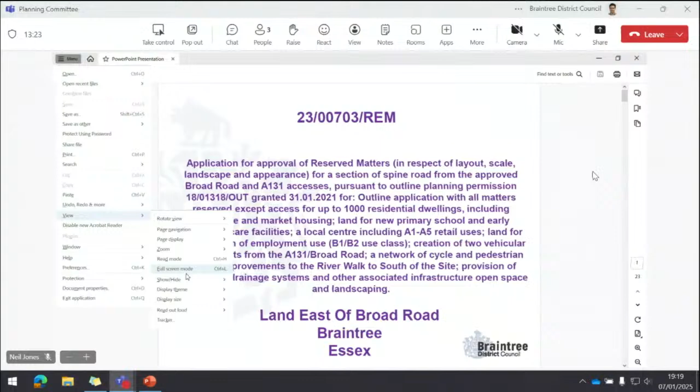We'll now move on to the officer's presentation, which will be given by Neil.

Good evening, members. This is an application for approval of reserved matters in respect of two stretches of highway, one on the western side of the site coming off Broad Road and one on the eastern side coming off the A131. As members will remember, the outline application approved access at those two points. So this is approval of the reserved matters - appearance, layout, scale and landscaping - for those first stretches of road coming into the site.

So this broadly is the site here. You've got Broad Road coming along the western side, the A131, the Braintree bypass on the eastern side, and what we're looking at here is two accesses, or two lengths of highway, coming into the site - here off Broad Road and here off the A131.

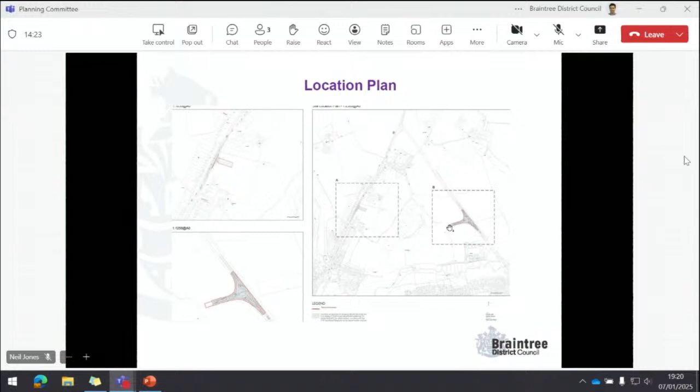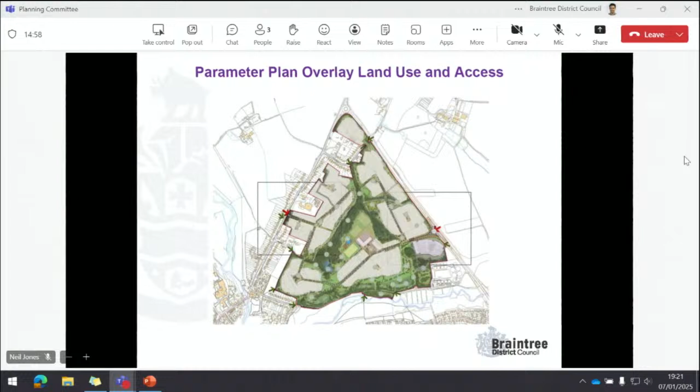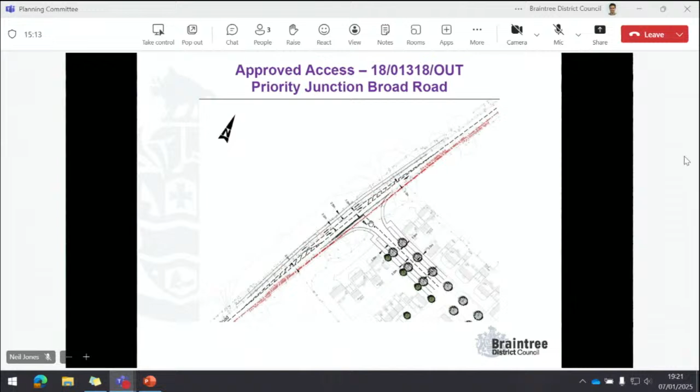In terms of what we'd approved previously, this was the drawing showing the access coming in off Broad Road. You can see Broad Road being changed to create a right-hand turn lane as you come in. This access point was agreed here, and this is the spine road design for what's termed Area 1 within the application documents. This is the approved access, and this is the first length of carriageway coming into the site.

You can see grass verges to either side, footway and a footway cycleway to either side. You can also see the crossing point here, just where it's envisaged that when the residential parcels come forward, there's potential for small private drives with residential access coming off either side.

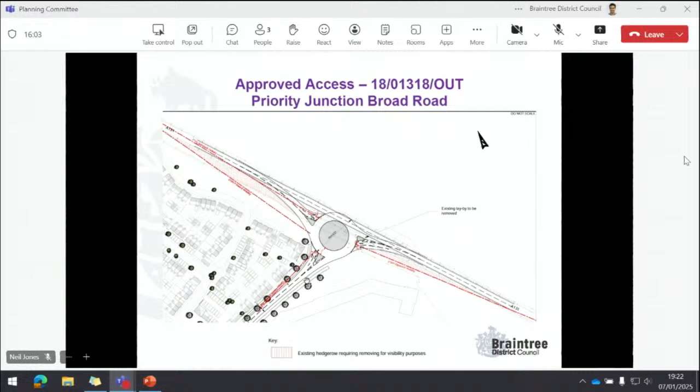Looking at the other side of the site, this is again the approved drawing from the outline permission. This is the roundabout which will be constructed on the A131 and the first length of road coming into the site. This is what we've got in terms of the reserved matters, so the first length of carriageway coming into the site. Again you can see the same arrangement: 6.75 metre wide carriageway, 3 metre grass verges either side, and then the pedestrian footway and the foot cycleway to either side.

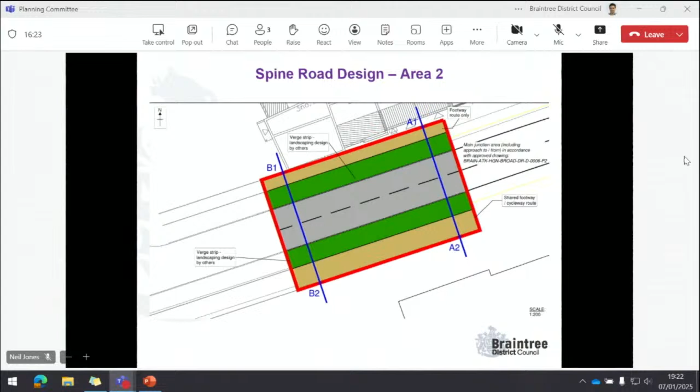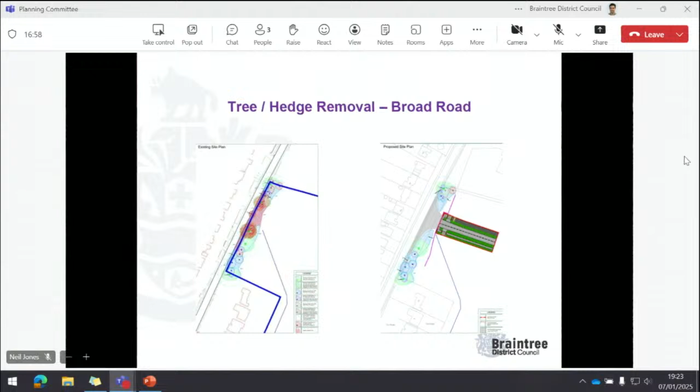We appreciate that members are always concerned about the loss of trees and hedges, and regrettably that is required here. But to make the point, what we're looking at with this application is the first lengths of road coming into the site, so there are no additional trees or hedges being proposed for removal as a result of this application. There were obviously trees and hedges needing removal to facilitate the accesses, but those access points have already been approved. So we're not reporting any additional losses of trees or hedges which weren't previously considered and approved by the council.

Within the application that was submitted, there were details showing how the trees will be planted, how they'll be anchored and supported, and tree root protection measures being put in place. As planning officers, we didn't have any issues with what was being proposed. This was what was envisaged by the design code, as was the tree type that the applicant specified.

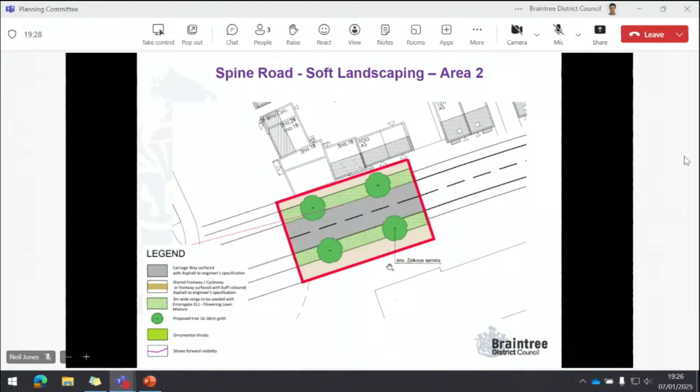So what we're recommending is approving some of the details of the landscaping. If we go back to the previous drawing, we'd be approving this drawing, showing trees being planted within the verge at these sorts of spaces. But what we're not approving is the species of tree or the planting details here. These may be the details that end up being approved, but what we want to do is make sure the Highway Authority are comfortable with all of those details as they're worked up through the Highway Works Agreement, which would allow the road to be adopted if it was built.

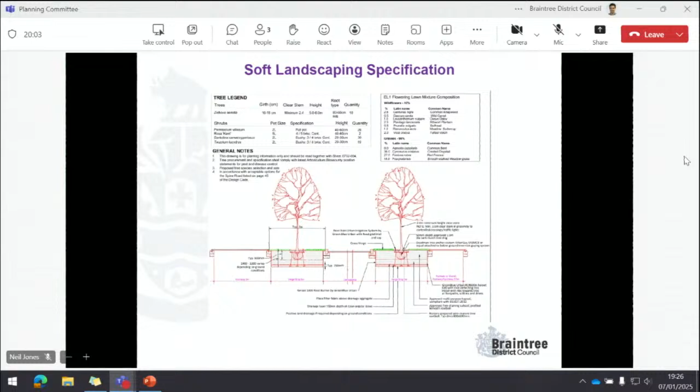So what we're looking to do is recommend approval, but with some of these details around the landscaping to be covered by condition, so that the planning authorities still have the ability to consider and approve the details, but that's done in connection with the Highway Authority as part of the Highway Works process.

So this is just an image of the tree being suggested by the applicant. This is one of the trees that was included within the design code we approved as part of the outline permission. I've put some details there with regards to the tree type from the Royal Horticultural Society. The planning officers who assessed the design code, the urban design consultant we use, and the landscape officers were all happy with this as a street tree.

Moving on, just in terms of a couple of photos to show the context. Anybody familiar with the Braintree bypass will be aware of the lay-by as you come up the hill towards the High Garrett roundabout, coming up towards the top here. This is the location of where the roundabout would be formed coming in, and this is just a photo showing the inside of the hedge and the site. This is what the entrance will be coming in.

And then on Broad Road, this is just a general picture showing the area where the access would be formed coming in. And this is just looking from within the site, looking back out towards the houses on Broad Road. So that's where the road will be coming in on that side.

So just in terms of a summary, this is part of a larger site which benefits from outline planning permission. We've already approved the access through the outline permission. What we're looking at doing here is approving some further details with regards to the road coming into the site. We've assessed that against the design code approved as part of the outline permission. The proposals are consistent with that. There's no conflict, and therefore we're happy this is achieving the quality we were looking for when we were granting permission originally.

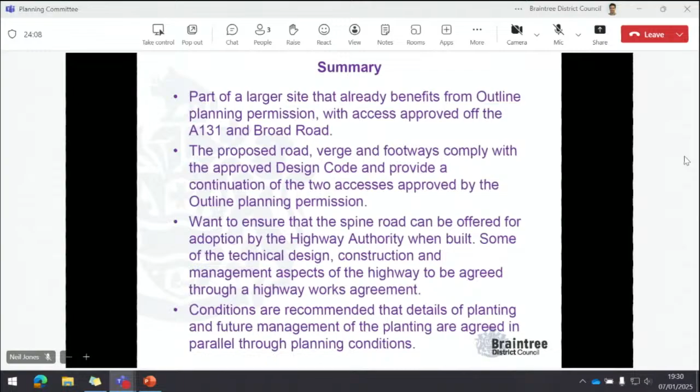Councillor Spray: I wasn't necessarily expecting to go first, Chairman, but I'm happy to do so. I think this is relatively uncomplicated. It already has outline permission, and this is, as Neil has said, almost an additional application for us this evening to look at some of the details of the access which have been approved. It makes sense for me that the details of the planting be deferred for a little while longer until the applicant has confirmation from Highways that they're happy with the arrangements being proposed. So it makes sense to do that. I just think we need to be confident that the planting suggested - well, it doesn't have to be exactly as we've seen this evening - but that it is of good quality and is maintained, which is important. But other than that, I personally see no other reason to dispute anything in the report this evening. I'll leave it at that for the moment. Thank you.

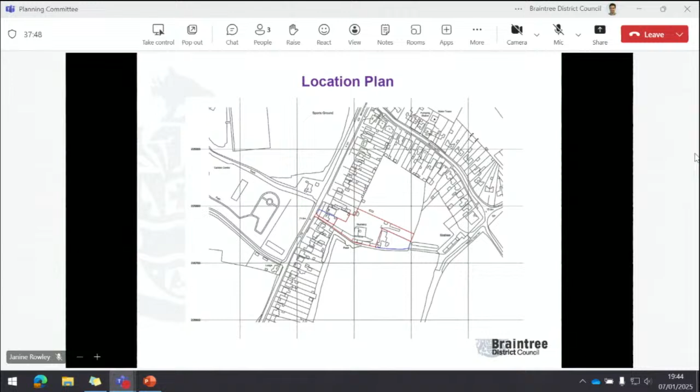As set out in the officer's report, officers acknowledge no permission is required for the siting of the lodges as long as they comply with the dimensions stated in the Caravan Act. However, the submitted indicative site plan of the permanent mobile homes would result in a form of development out of keeping with its surroundings, unlike the prevailing local character.

The proposal would change the use of the land to a use incompatible with the countryside and develop a site beyond the settlement boundary in a form discordant with the linear pattern of existing development, to the detriment of the countryside and the character of the area.

As I said earlier, officers acknowledge that the local planning authority have no control over the mobile homes themselves, providing they meet the definition of a caravan mobile home, but the change of use of land to accommodate 15 mobile homes in this location would be considered harmful to the character and appearance of the site and the wider locality.

Officers would also expect at least 25 square metres of amenity space per mobile home. However, the indicative layout illustrates that amenity areas would be directly overlooked due to the limited separation distance and would result in interlocking. There are also several units which would benefit from narrow amenity strips, for example to the northeastern corner, and then to the southern boundary. This plot here would obviously be hindered by significant tree coverage, similar to this northeastern corner as well.

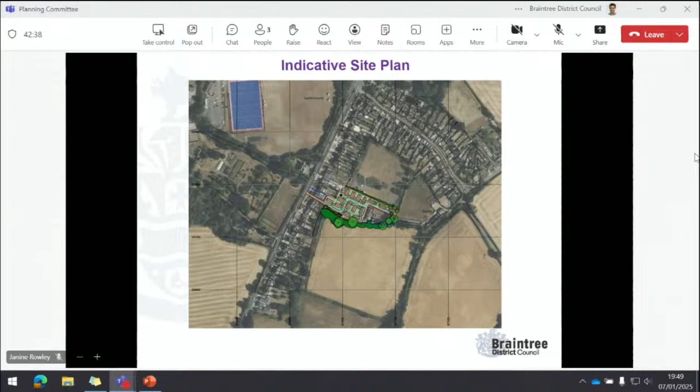This plan highlights the tree constraints. The application was accompanied by a tree survey and various other supporting documents.

However, the Council's Landscaping Services has reviewed the proposal and considers insufficient information has been provided to fully assess the impact of the proposals, given that there are potential issues for harmful impacts onto the trees, particularly ones that are of significant interest, for example, to the south of the site.

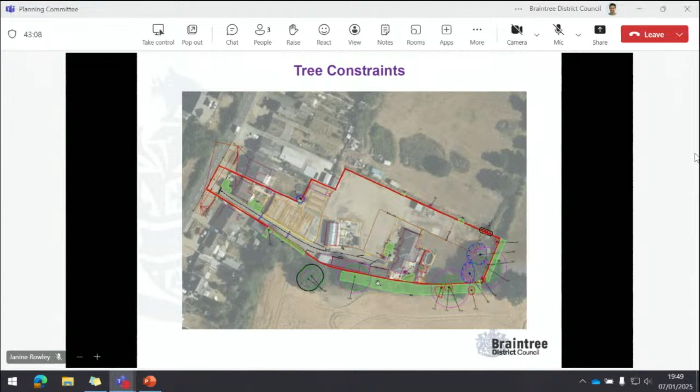The next drawing is a survey. This illustrates the location of the hard standing and existing buildings on site to be demolished.

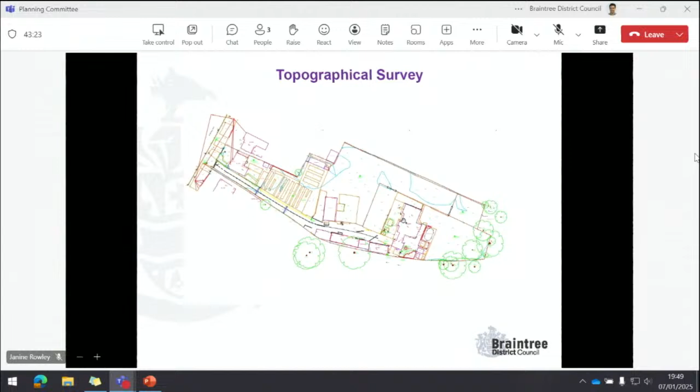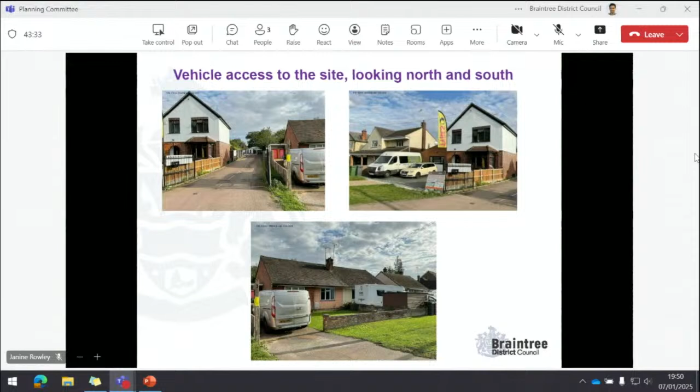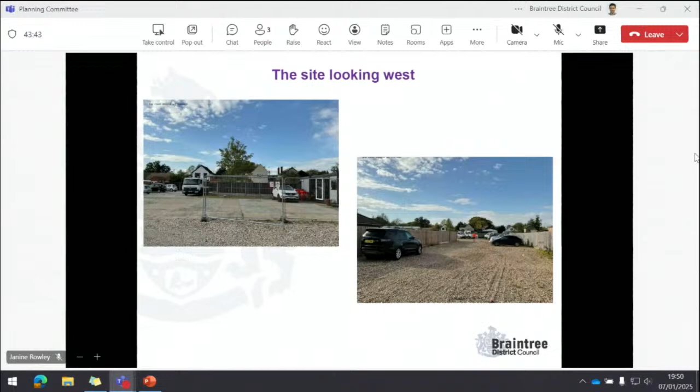The next few slides are photos of the site. This shows the vehicle access to the site looking north and south, the existing footpath, the vehicle access from in the site looking west, the site looking east, southeast, and to the west again.

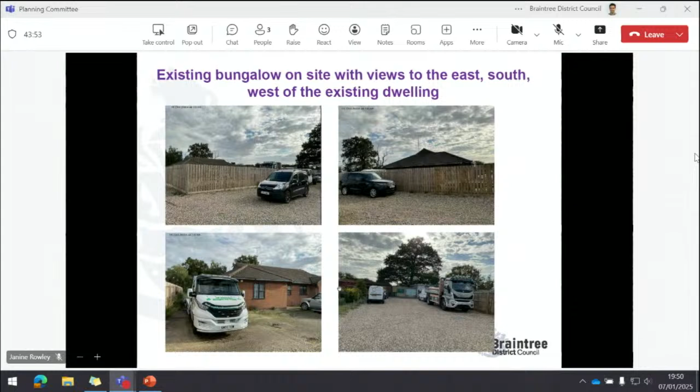This is the existing bungalow to the rear of the site, again with views to the east, the south, and the existing bungalow itself.

To summarise, the application is a full application for a change of use of land for the siting of 15 mobile homes. In terms of its benefits, it would deliver 15 mobile homes of permanent occupation and economic and social benefits during the construction and thereafter.

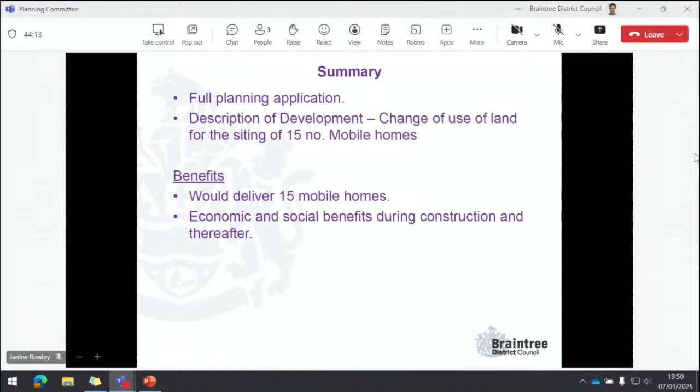In terms of the adverse impacts, the proposed change of use would, by reason of its location and layout, fail to reinforce local distinctiveness of the built environment, and by reason of its siting of the mobile homes represents a visual intrusion into the local landscaping, which would be out of keeping with the pattern of existing development. It would fail to achieve a high quality design out of keeping with the prevailing character and appearance of the countryside.

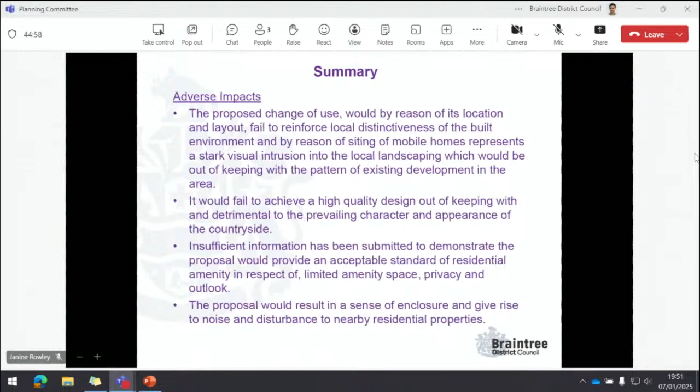Insufficient information has been submitted to demonstrate the proposal would provide an acceptable standard of residential amenity in respect of limited amenity space, privacy and outlook. The proposal would result in a sense of enclosure and give rise to noise and disturbance to nearby residential properties. The proposal also fails to provide a sufficient level of on-site car parking.

Insufficient information has been provided in relation to protected species, and the lead local flood authority has a holding objection based on the submitted drainage information at this time.

Landscaping services have also raised a holding objection based on insufficient information provided to fully assess the impacts on the trees. There is no agreed Section 106 agreement to secure all the identified planning contributions, including the impacts on increased demand for services, facilities, including affordable housing, health provision, open space or a refuse strategy. The proposal would also increase recreational pressures on the designated sites, and the lack of a secured financial contribution would impose detrimental impacts on these sites. Therefore, the application is recommended for refusal for the reasons set out in the report.

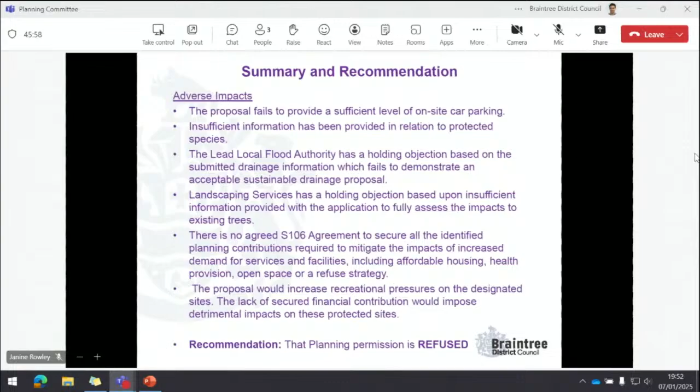Councillor Finken: I think this is one of the most inappropriate applications that we've seen since we've been on this committee since the election. It's totally out of keeping with the area, and all the reasons given, I think, have led to the conclusion that it shouldn't be granted. So I would agree with everything that the officers have recommended.

Councillor Shreer: Thank you, Madam Chairman. It's not very often we can concur tonight, but I think, as was pointed out by the officers about the Caravan Act and the Caravan Mobile Home, there's no real concerns there from a planning perspective. But as the officer made in the summary and recommendations, everything else that hasn't been completed or complied with absolutely overrules this application going any further under the conditions as we've heard tonight. So I agree with the officer's recommendation.

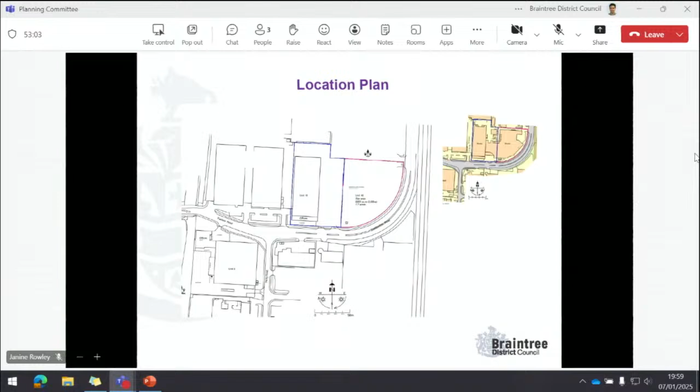This is the existing site plan. So this is the existing site on the corner location. This is Unit 18, which has been recently refurbished. This plan highlights where the green area is, that is where all the buildings have been previously demolished on the site.

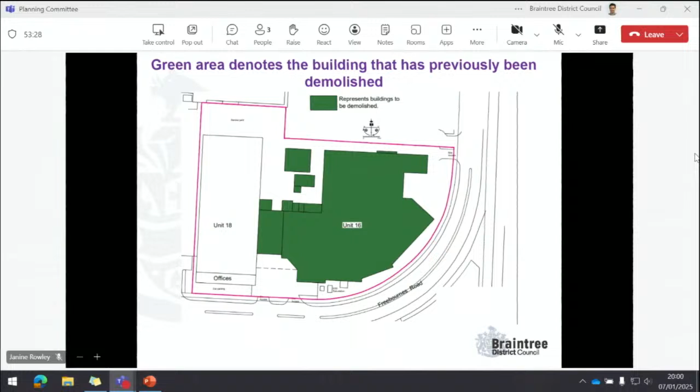This would be condition, I think condition 6, would be imposed to ensure full landscaping details would be submitted and to ensure an enhancement of the character and appearance of the area together with net gain in tree planting, shrubs and hedging. There are no neighbouring residential properties within the vicinity of the site, however environmental impacts such as external lighting would be conditioned.

For example, the external lighting is conditioned via number 7, as set out in the report. No objections have been raised by the Council's Environmental Health Officer in terms of air quality, and no objections have been raised following receipt of revised information in respect of flooding or drainage from Anglian Water or the lead local flood authority. The proposed parking provision is policy compliant, and the spaces shown meet the recommended sizes as set out in the parking standards.

As I said, there would be one sole access to the site to the northeastern corner, which is already in place on site. Essex Highways have raised no objections to the scheme in terms of the additional vehicle movements to the site, trip generation and overall impacts on the highway network.

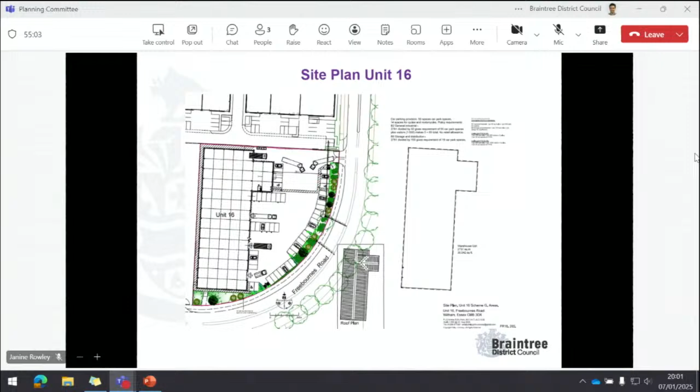It uses cladding to break up the overall form, a grey palette, and features horizontal cladding to the entrance, reveals to the roller shutter doors, windows, and a brickwork plinth. The appearance of the building would be typical of the industrial estates in this location, most notably to the building to the west, but also to the immediate north there are cladded buildings. There are a variety of scales and bulks and footprints within the industrial estate, including tall eaves and shallow pitch roofs, in which this development would respect that existing character.

The overall massing is broken up with the use of the different cladding to provide both light and interest to the elevations.

The overall scale and massing is considered acceptable through the elevational detailing and articulation. The building has been designed to achieve a very good BREEAM standard in accordance with policy LPP72 of the adopted local plan.

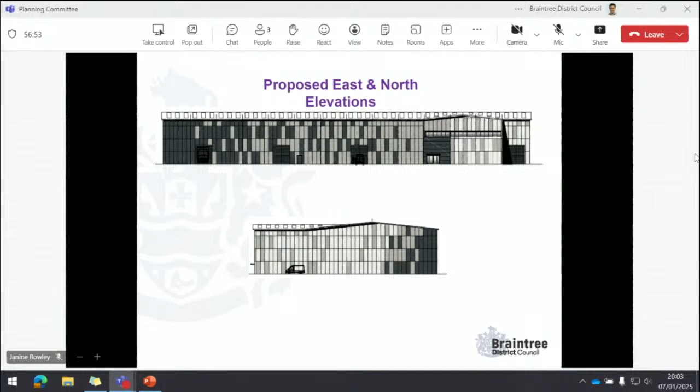As set out in the main report, the permitted development rights within Part 14 of the General Permitted Development Order would enable the end user of the site to expand renewable energy sources to meet energy needs in the form of solar panels if required at a later stage.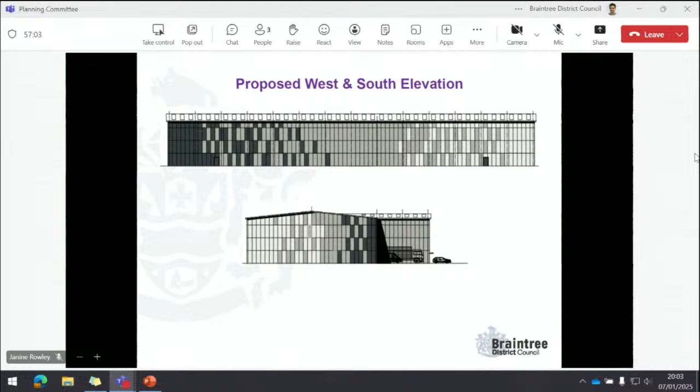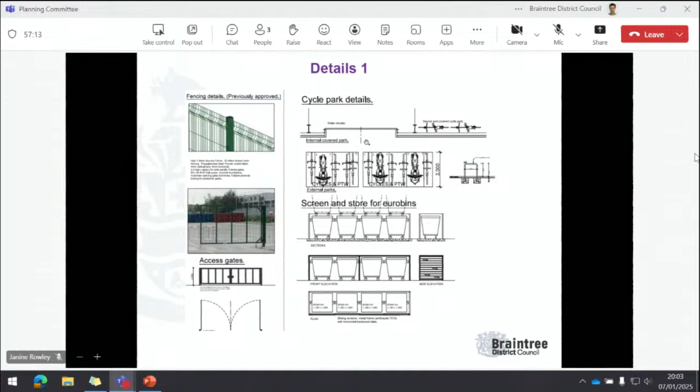This is the proposed west and south elevations, illustrating the cladding that would be proposed. This is some detailing - the fencing detail has already been granted permission and installed. These are the access gates, cycle details and refuse storage.

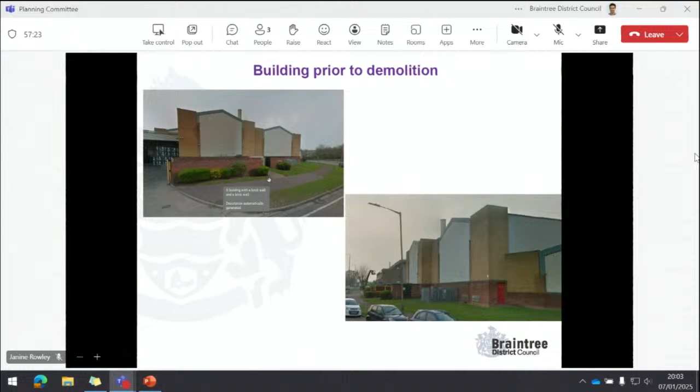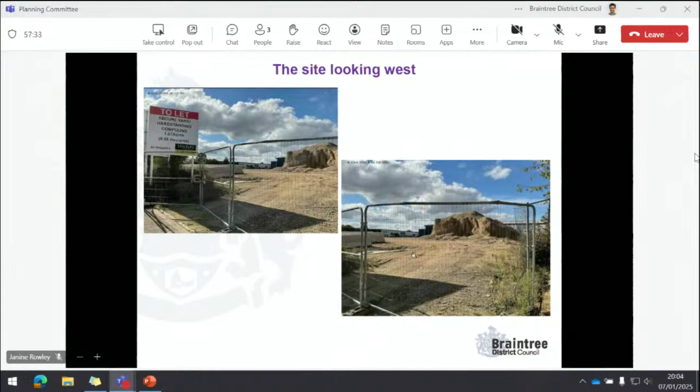Just to illustrate what was actually on site previously - this was the building that was demolished. This is what's on site now. As you can see, the cladding shown on the elevations is a very similar design and scale in terms of the shallow pitch roof design. The site looking west, these are the existing trees.

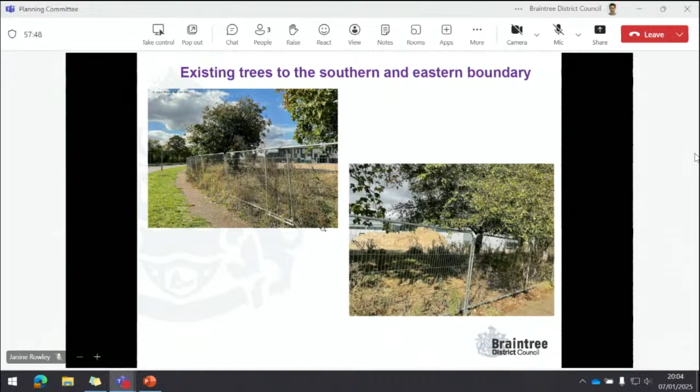The site is not located in a conservation area, and the trees aren't worthy of protection. However, the applicant is seeking to retain them and provide additional planting in the form of trees, shrubs and hedges. This is the site to the south, east and west.

To summarise, the principle of development is acceptable. It would be compliant with an employment policy area designation and would provide social and economic benefits through the construction and management activities relating to the development and employment opportunities.

The scale of the building is effectively managed through the elevational design, in keeping with the local context. The building would meet BREEAM Very Good standards as required by local plan policy. Access and parking matters are acceptable, including sufficient cycle storage and EV parking.

Whilst there could be potential impacts in terms of additional noise, lighting and disturbance, these impacts are not considered to outweigh identified policy support and public benefits. As I said earlier, lighting has been restricted by condition. Landscaping plans seek to retain the trees and provide additional landscaping, which is acceptable. Other Section 106 matters include an open space contribution together with a travel monitoring fee.

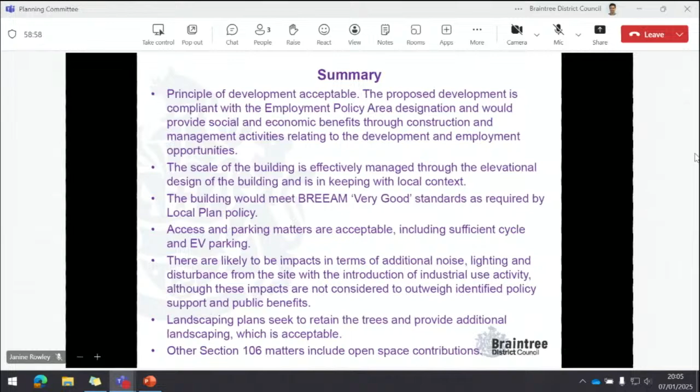Just to clarify, there has been an update to Condition 6, following the publication of the report. It was noted that the lead local flood authority has not raised any objections in terms of the hard standing surfaces needed for industrial purposes. So taking that into account, I've changed the wording slightly.

So all areas of hard standing should be submitted to and approved in writing, because as you're probably aware from the photos, there's a large expanse of existing hard standing. Whilst some areas could be permeable to withstand the industrial HGV vehicles, they may need a different type of material, and that's why we've changed the wording of the condition in this instance.

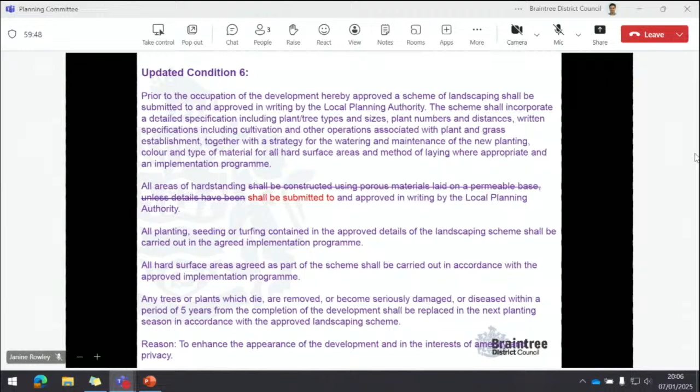Taking the details and recommended conditions into account, together with that update, officers consider that there are no material considerations that indicate a decision should be made other than in accordance with the development plan. So planning permission is recommended subject to the conditions and the Section 106 obligations set out in the main report.

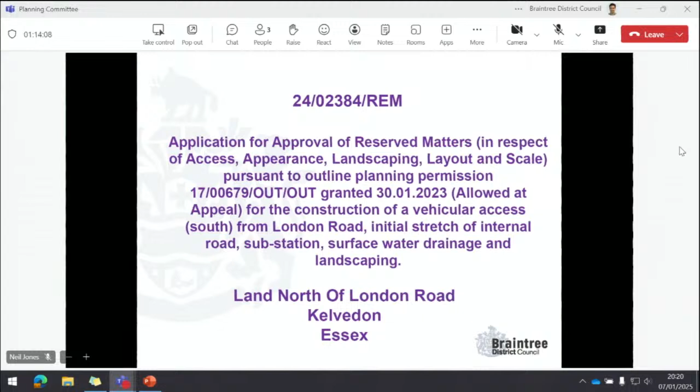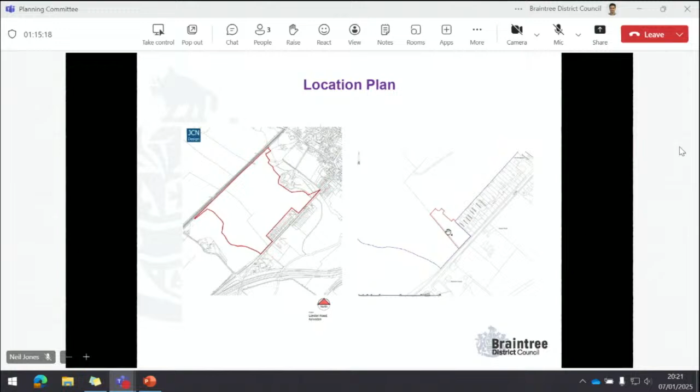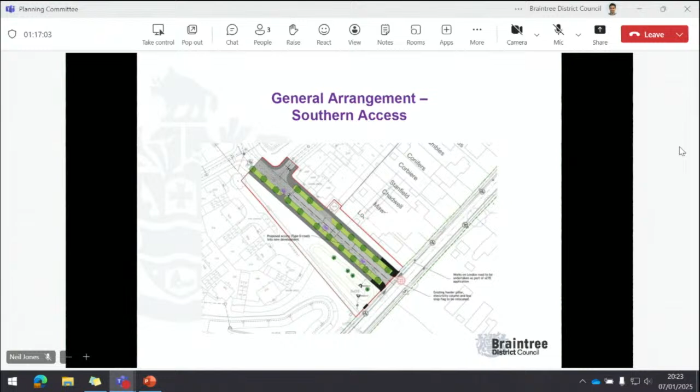So that's just showing a larger context. The general arrangement, again the same. And then this is the illustrative master plan.

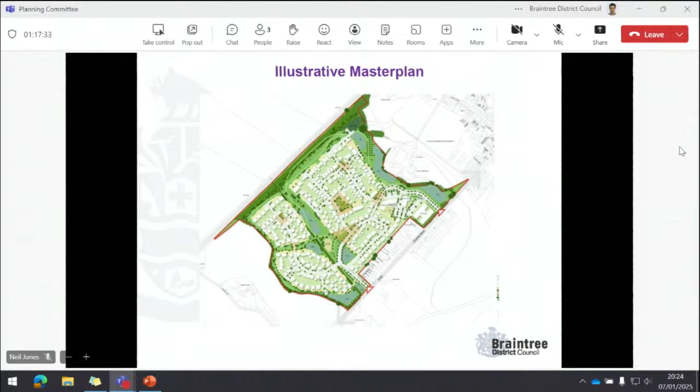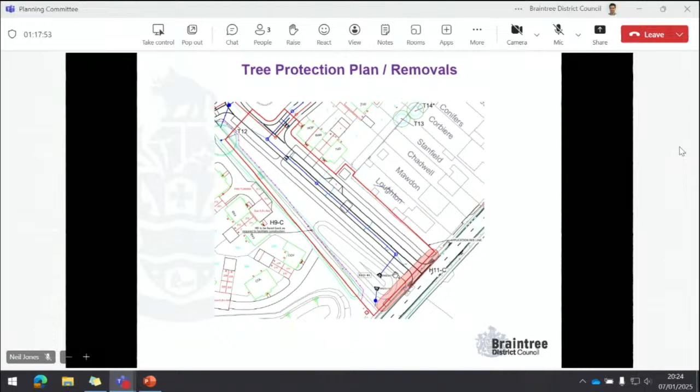So the application will require the removal of hedgerow across the front of the site, approximately 39 metres of hedge which is to be removed, as denoted here with the red shading. So these are some photos.

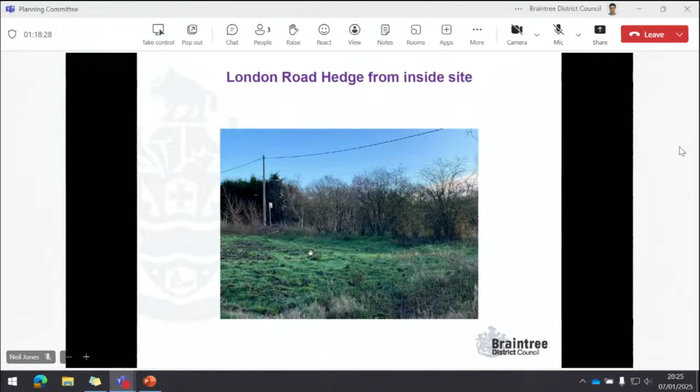And then this is just coming back inside the site, looking back out, so you can see a different perspective of the hedge which will need to be removed.

So this hedge is to be retained. The parish council did have some concerns about the extent to which the hedge could be retained. The consultant arboriculturalist acting for the developer has said there will be some pruning works required to facilitate the construction of part of the basin, but they consider that the distance from the hedge and the fact that there is a ditch intervening, and this has been a ploughed field as well, would mean the hedge should not be adversely affected by the construction.

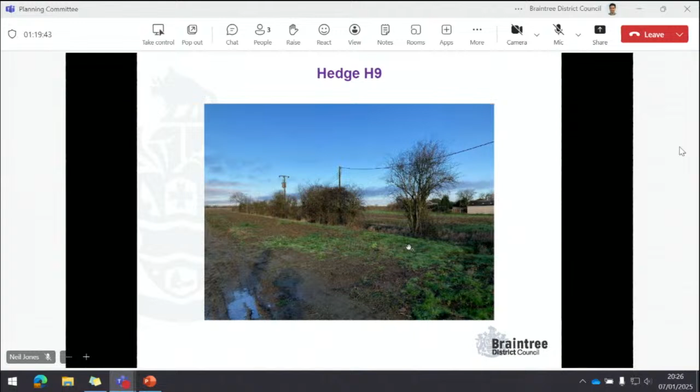The ditch is to remain. The SUDS feature will be constructed on the other side of that. This is looking just along that ditch there, and this is looking back across the site.

One of the concerns raised by Kelvedon Parish Council is they don't consider this to be the high level of surface water drainage design that they would expect on a new development, as referenced in the design guidelines within the Kelvedon neighbourhood plan. They would have preferred to see a basin holding a more substantial volume of water throughout the year, to provide an aquatic environment and biodiversity benefits.

The applicant has been made aware of the Parish Council's comments. The engineers have said it's not possible to re-engineer the basin within the space available, and still provide sufficient capacity for the drainage system to work overall. So they're content that the design is appropriate for the setting.

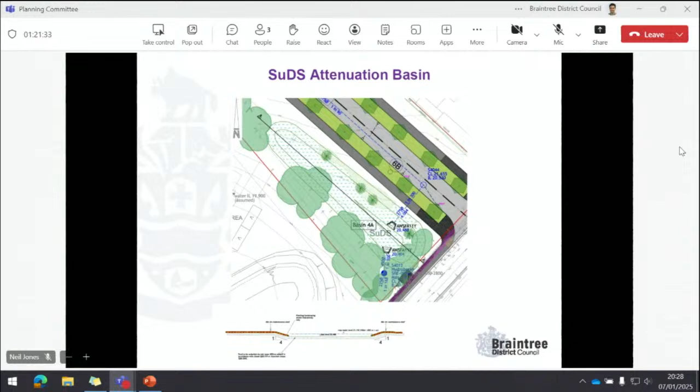This is one of the gateway features, which will be one of the main entrances to the development. They're satisfied that it can be appropriately landscaped and would be a positive aspect of their development.

In terms of the landscape proposals, we've also got the trees running along the road. Similar issue as with the Broad Road application earlier, in terms of trees which have been specified but which the Highway Authority have recommended are not approved at this stage, to allow consideration as part of the Highway Works Agreement, so the road can be considered for adoption.

And then there's shrub planting along the boundary with Loughton, running up here towards the substation at the back. Again, the Parish Council raised some concern about the suitability of some of the planting here.

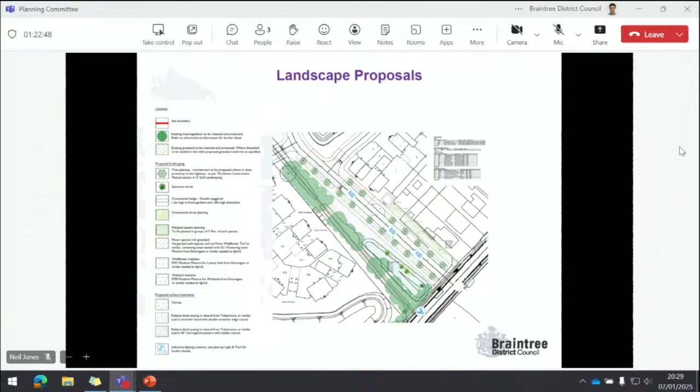Again, the developer is satisfied that the planting is appropriate. We do take the point that the Parish Council made about the setting out of the planting, that there's quite a variety of mixes of plants, shrubs and grasses, which is intentional. It's to provide visual interest and cover year round, but we do accept that the drawings submitted here don't provide the level of detail as to how the planting would be set out. So that can be covered by condition, so we can address that concern.

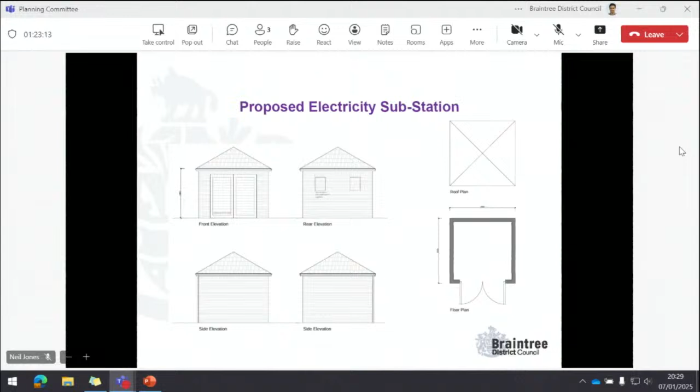The substation building is part of the proposal, so you can see here. It's a fairly utilitarian building in terms of appearance. It's likely it would need to have a means of enclosure around it, although we're not sure what the details would be of that. But again, that can be covered by condition.

I should just go back before I forget. When we wrote the committee report, we hadn't received the parish council response from Feering, but we had received it, and we did say in the report, if we received it, we would update members. So there were essentially three key points that the Feering Parish Council raised.

One was around the road type. It's described as a Type D road in the Essex Design Guide. Feering Parish Council point out that a Type D road should have a 6 metre carriageway, which is what we've got here. But either side, it should have a 2 metre footway on one side and a 3.5 metre foot cycleway on the other side. What's proposed for this application is 2 metre footways on either side. So the Parish Council say that's not correct. They think the foot cycleway should go in at 3.5 metres.

We don't consider, and the Highway Authority don't consider, that to be necessary. A Type D road can serve up to 700 dwellings, considerably bigger than is proposed here. The roads on the estate are intended to be designed with a 20-mile-an-hour limit, which should provide a safe environment for competent cyclists to cycle within the carriageway.

So we don't consider the 3.5 metre foot cycleway to be necessary. Feering Parish Council also noted a concern raised in the road safety audit, which the applicant's covering letter didn't refer to. That refers to the location of a bus stop and the level of visibility at the new junction. That isn't a fundamental issue. The Highway Authority are satisfied that the bus stop location can be designed appropriately as part of the Highway Works Agreement, so they don't see an issue that fundamentally affects the access and its safety.

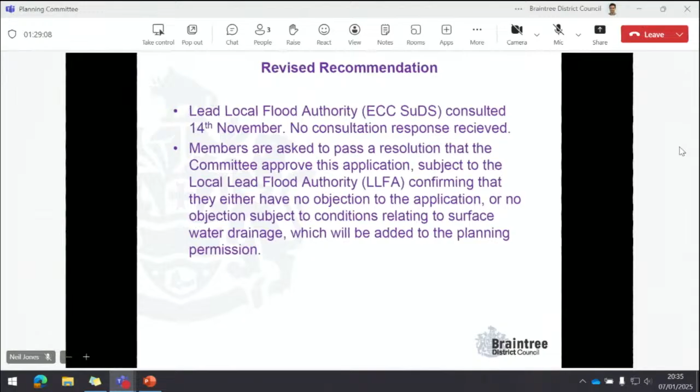Councillor Spray: Thank you, Chairman. I do think this is fairly straightforward because we largely have outline approval for the site, so this is a matter of detail. I would just say I think it's very disappointing not to have had a response from the Flood Authority. If they were consulted mid-November, that's more than enough time. It's something I have raised at the Essex Planning Portfolio Holders meetings the last two meetings - the last one I chaired on behalf of County Councillor Lee Scott - raising the lack of response from some statutory consultees. I know it's not just this authority that has that problem, and it is very disappointing that they haven't managed to come back in time, but there we are.

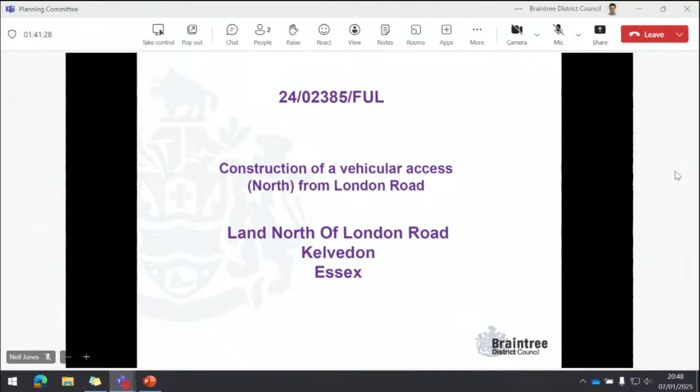The reason this is a full application rather than a reserved matters application is that the location of this will be within what was envisaged to be the landscape buffer by the outline permission. We can't consider a reserved matters application which isn't consistent with the outline permission. Although the applicant has applied to vary that condition through a variation application, which will come back to committee at a future point for determination, they wanted to try and get planning permission for both accesses so they could start discussions with the Highway Authority. So this is the reason that's led to this application being submitted as a full application, because it couldn't be a reserved matters.

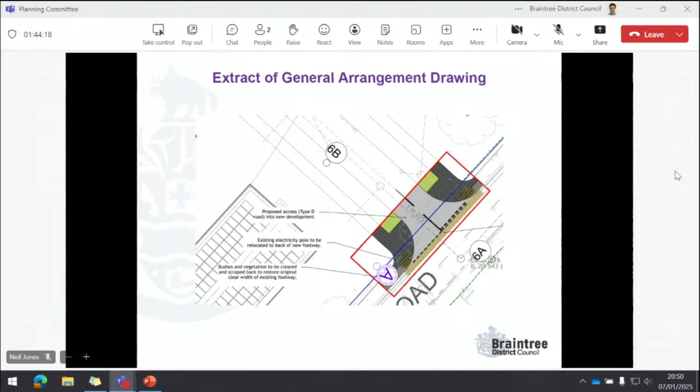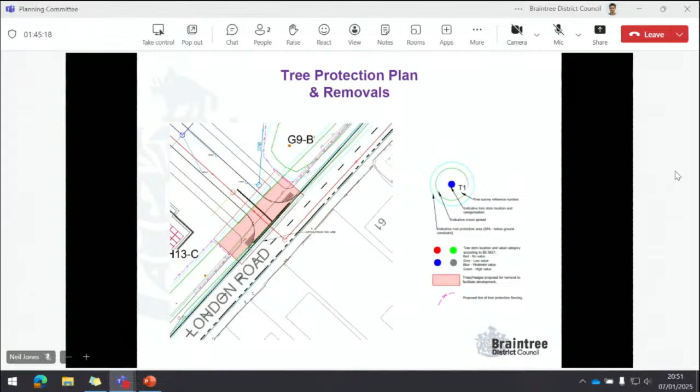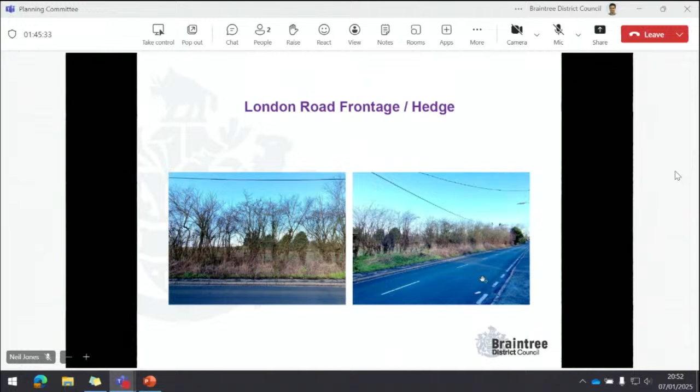This is a little bit further back to the south, showing the bungalow which is on the end of that ribbon of development. This is looking back across the site, showing the hedge along the frontage. And you can just make out across the back here the driveway which leads up to Church Hall Farm, which is the listed building that was the reason the landscape buffer was shown in the first place.

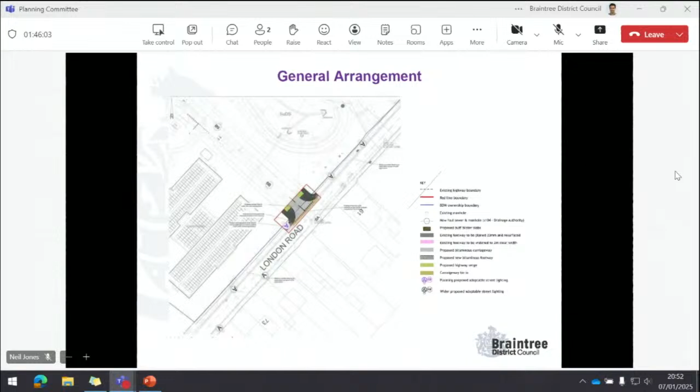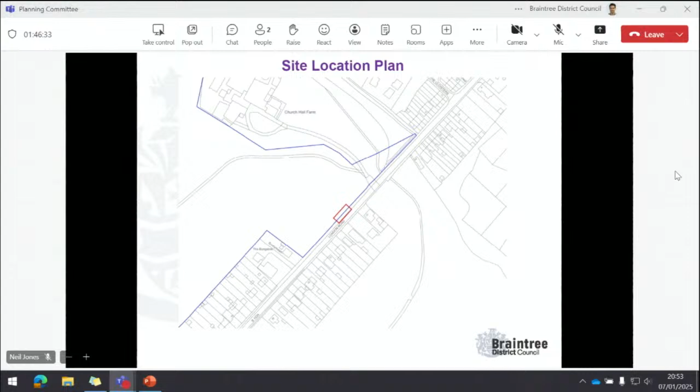If I just go back - this was the bungalow I was just showing, Sunnymead. This was looking back across, so what you could see was the trees along the edge of that boundary, within the adjoining land, I should say. This is the access driveway leading into Church Hall Farm, and there are several listed buildings within that complex. That is a residential property now, but there are several grade 2 listed buildings within that complex.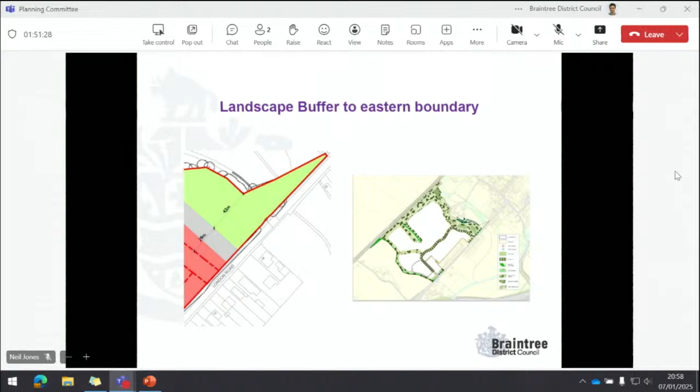So it will need to enter here, but it could go this way, it could go that way, it could go as it's shown on here. So we don't think that by fixing just the access and the first couple of metres of carriageway, that would prevent members from making their own decision about the rest of the landscape buffer when the variation application is considered in the future.

I'll do the same again as I did with Feering Parish Council. The points were the same, so they made the same objection point we didn't report in the committee report, about the Type D road and foot cycleway. They commented on visibility afforded to people using the access depending on where the bus stop goes, suggesting a bus lay-by to prevent visibility being obstructed. Again, the Highway Authority are happy to approve the position and location, with bus stop arrangements determined as part of the highway works. Feering Parish Council also made a similar comment about electricity and lighting poles within the footway. No additional points beyond that.

The summary is much the same as the previous application, so I won't repeat it all. The difference here is the issue of the landscape buffer - that's the reason this can't be considered a reserved matter. It's a full application, but as we've tried to explain in the report and presentation, the applicant has designed the scheme so they are only seeking approval for the position of the access.

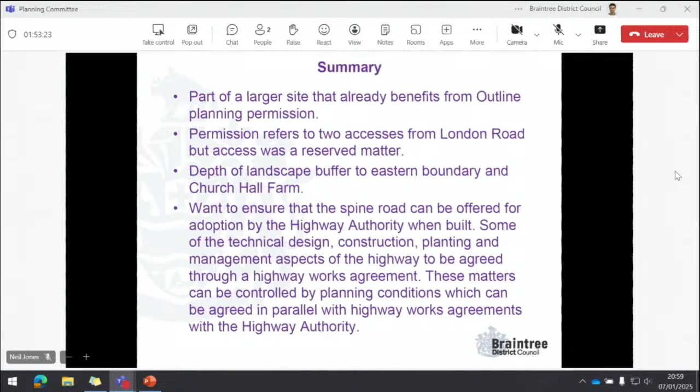Thank you, Neil, for taking us through that and explaining it. Councillor Abbott - could I start with a question, please?

So have they already moved that in terms of that drawing compared to the original? That isn't part of the approval. That's shown for information. But yes, the care home, when it is wherever it goes, will need to go in what's termed as the community hub.

So those are the community uses which were approved as part of the outline permission - that's the care home, the retail units, the early years and childcare facility, and the health centre. All of those uses need to go in what's termed the community hub, at the northern end of the site, by virtue of the appeal decision from the planning inspector.

But I think we can see their intention, can't we? Although that's not part of the application, they're giving the game away. To me, this is a Trojan horse - this is just establishing a principle. Well, we want the access here, and we're not going to show you where the road's going to go into the site like they have at the other end, because they're going to come back and change things. So I can't support this. I fully agree with the parish council - we shouldn't be looking at this in isolation, because this is a game that's being played here. Let's establish where we're going to come in, and we'll do all the detail later.